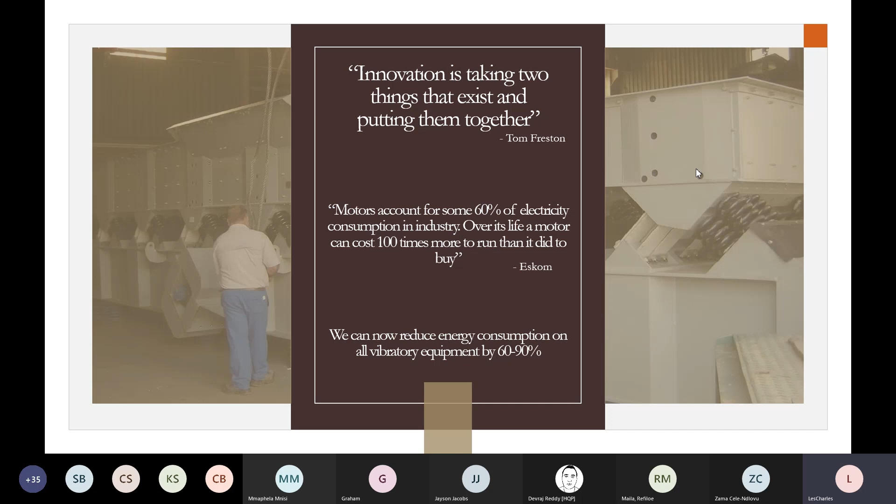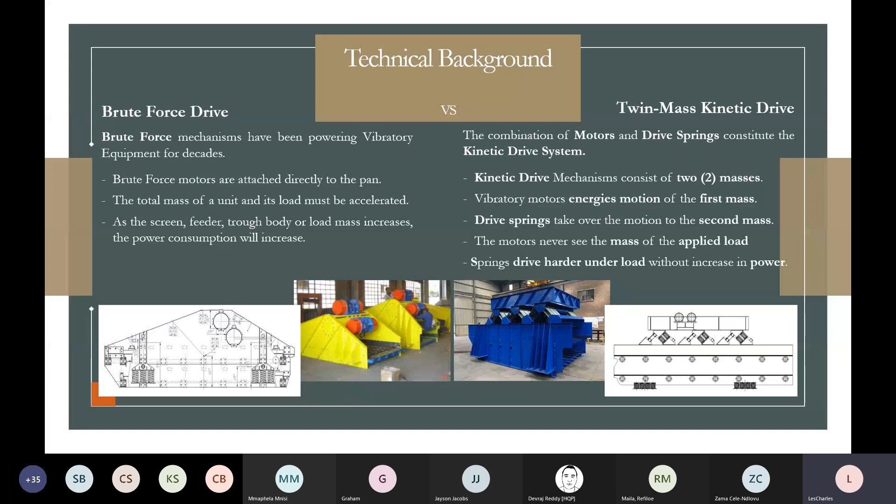Discussing some of the few advantages, and I will go into some of the technical details as to why these advantages are important and why they are applicable. Obviously, we have discussed the power advantage in that this equipment will reduce power by up to 90%. It does this because the motors only have to drive the first mass of the unit and never see the mass of the pan or the applied load.

The advantage of efficiency comes in that we know that in the mining industry and material processing, material characteristics can have a real effect on your processing. So with the kinetic drive systems, because the drive springs are there to absorb any change in the flow of material, there is no drop in efficiency when material becomes more dense or heavier or lighter. The drive springs simply absorb any of the differences.

When we are talking throughput, we are able to take feeders up to 1,000 tons per hour. We can do this because the motors are not responsible for driving that entire mass, but rather just the first mass, and then the springs each have a power producing effect to drive the rest of the mass.

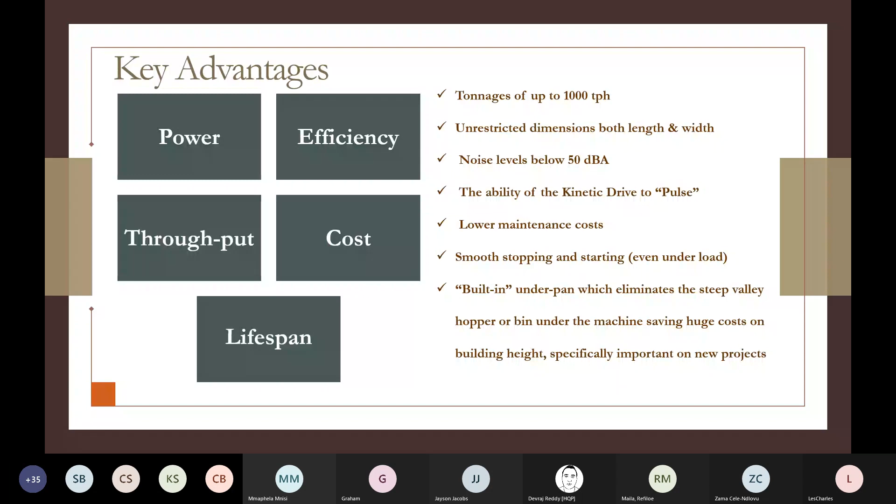Go through a couple of case studies. This is a feeder we did for Anglo Gold, when Kopanang mine was still owned by Anglo Gold, and was designed to extract ore from the silo at 1,000 tons per hour. This 2 meter by 6 meter energy saving feeder was designed, manufactured and installed utilizing just two 3.5 kilowatt motors. The previous system was a conveyor belt, which honestly gave the mine endless problems.

And that is why within the first month, the output was increased from 7,500 tons to 68,000 tons, and had the potential to increase by 120,000 tons. This reduced the operational cost by more than 250,000 Rand per month, and the load time to fill the 8 railcar hoppers was reduced from 14 hours, which included the average breakdowns and clearing of the belt, to under an hour. With traditional brute force vibratory feeders this was not possible because of the need to stop and start the unit under load. Obviously, filling a rail hopper, it would have to fill a cart, stop, and then start again under load.

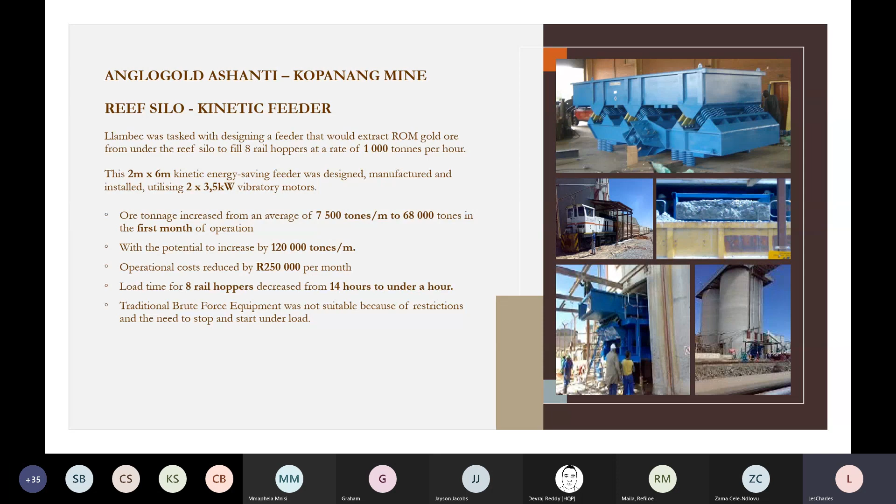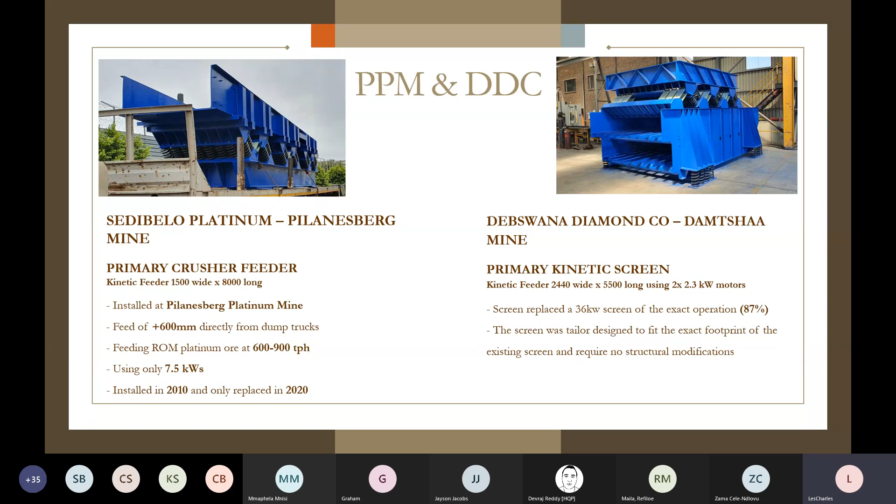Our most recent project on the right-hand side is a double-deck screen that we did for Debswana Diamond. It's a primary screen that sits on Damtshaa Mine. The screen is 2.4 meters by 5.5 meters long and uses just two 2.3 kilowatt motors, so 4.6 kilowatts in total. The screen it replaced was a 36 kilowatt screen doing the exact operation, and that is an 87% saving of power. The screen was designed to retrofit the exact footprint of the current screen, and therefore no structural modifications were required.

This unit was 1.5 meters long, 1.5 meters wide by 5.5 meters, and used only 1.8 kilowatts - two 1.8 kilowatt motors, a total of 3.6 kilowatts.

This unit is fed directly into a small chute on top of it from a front-end loader. Material size varies from ultra fines to upwards of 600 millimeter lumps. This unit does a separation of 100 millimeters, and using a VSD, the capacity of the screen varies between 90 and 120 tons an hour, with the potential to increase up to 200 tons an hour.

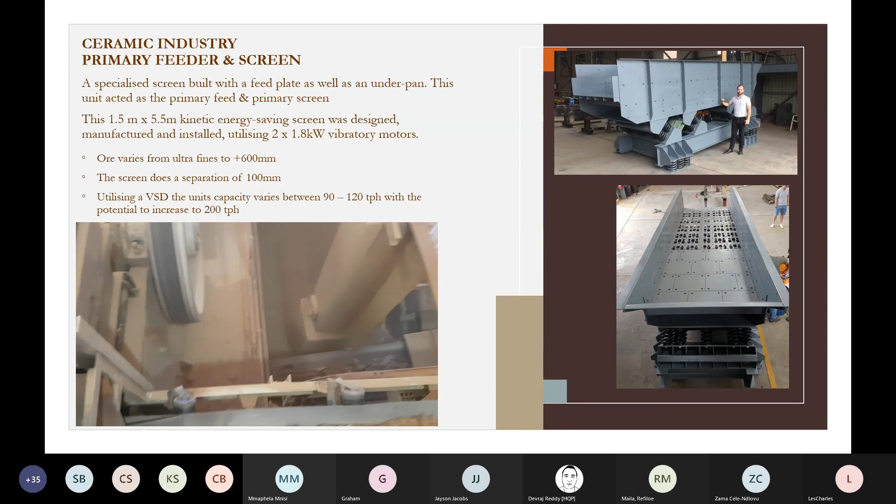As you can see with the built-in underpan, the screen has the ability to sit directly on the floor, and your fines can be exited with a conveyor belt at ground level.

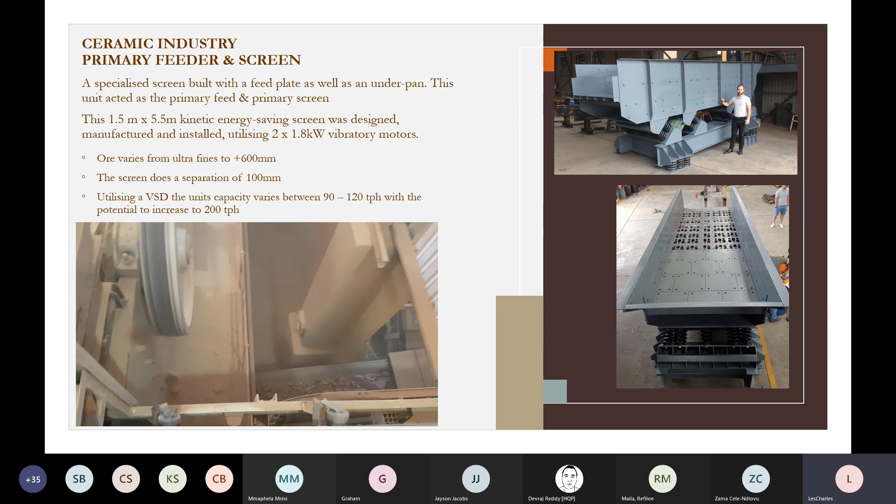When discussing the typical return on investment of a screen, there are a couple of factors we need to take into account. Average cost of a screen on most large mining companies is between 2 and 3 million rand. Each of these mining companies have approximately 8 to 16 primary screens per plant.

We have taken the typical kilowatts times the hours per day, times approximately 330 days per year, and you get an annual saving of 483,000 Rand per screen. So you can imagine if this was applied through 10 or 15 screens on a specific application, it has the potential to save South Africa not only millions of rands, but also a substantial amount of power.